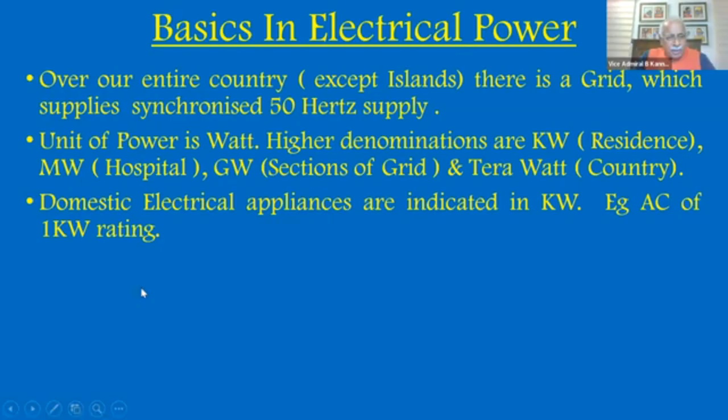Domestic electrical appliances which you buy, refrigerator, AC, are normally indicated in kilowatt - how much power they need. So let's say you have an AC of 1 kilowatt rating in your house, in one of your rooms. That AC wants 1 kilowatt of power. 1 kilowatt means 1000 watts of power it wants. If you run this AC for 1 hour...

...it consumes energy of 1 kilowatt hour, and that is your standard unit in the KSEB bill. When you see the KSEB bill, it will say so many units you consumed - actually, the unit is kilowatt hour. If you run your AC, which is 1 kilowatt rating, for 1 hour, then it will take 1 kilowatt hour of energy. So see the difference between power and energy: AC needs 1 kilowatt power, but when you run it for 1 hour, it is 1 kilowatt hour of energy.

So energy is power into time. Just remember this, because you will find some graphs being shown, which sometimes represent energy, and we'll talk about why we have different sources of energy, etc.

Now, the same thing, I said kilowatt hour. It can extend to gigawatt hour, it can go to terawatt hour. Whatever is the wattage multiplied by hour is energy. Just remember that. I finished with the basics of engineering. You have to just remember energy is power into time.

In your house, the meter is fitted. It's called the energy meter, because it measures how much energy you consume, and your bill will be prepared accordingly. For 1 kilowatt hour of consumption, so many rupees will be the charge. So energy is your consumption. Power is the rating of the appliance or of the building or of the institution, etc.

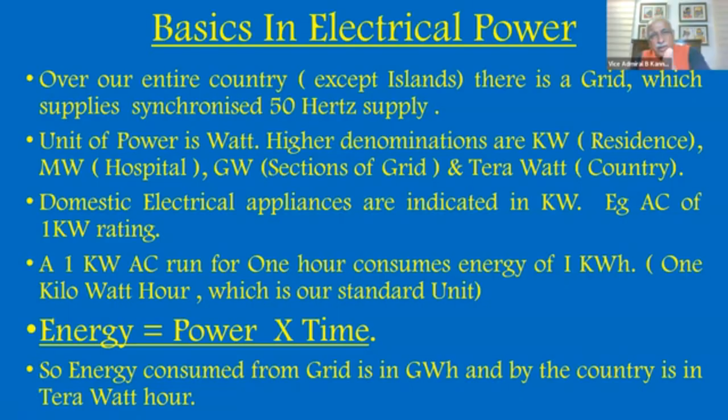Okay, so let us start our introduction to the topic.

India has got 16% of the world's population, and everyone, as per government, has got access to electric supply. As of now, every house in India has got supply by the grid, which is one common grid. But India consumes only 6% of world supply. That means our consumption of energy is very low. Population is 16%, consumption of power 6%.

We are very fortunate. We don't require so much cooling in summer. Summer is not very long. Then you have a good monsoon. Our cold places don't require so much heating up. So your consumption of power, of energy, is less.

The Ministry of Power in Delhi controls generation, transmission, distribution, etc. They give the guidelines. They make sure the contracts are in place, etc. And they also import and export power from other countries.

That's important information. We buy power from Bhutan, we buy power from Nepal, but we also give power to Nepal at some other point. So at the moment, it's only Bhutan and Nepal which is involved with our power. Bangladesh is not there, but we have some plans to give to Sri Lanka and in the Middle East also, though that has not yet started.

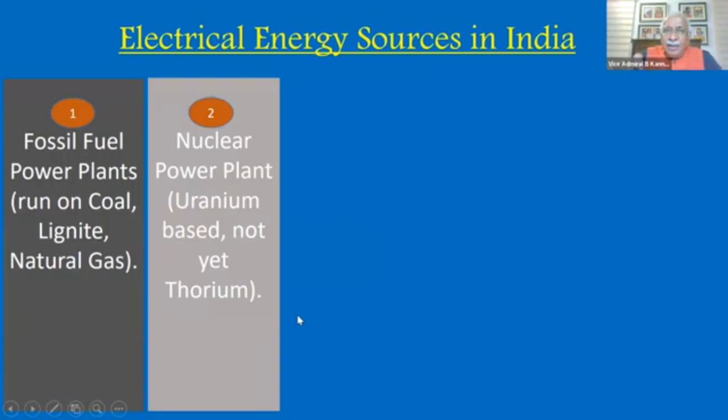So let us look at what are the sources in India. First is fossil fuel - coal, lignite, natural gas. That is one type of source of power. Second is nuclear, based only on uranium. We had hopes that our thorium plants will work, but it has not been proved so far for commercial application. So our nuclear power plants continue to work only on uranium, which we don't have enough of.

We'll come back to this point - just remember our nuclear power plants work only on uranium. Thorium is still an experiment which is going on. Then renewable: solar, wind, hydro is also renewable - when the rain comes, it renews the water, so it's called renewable - and biomass. All these are a form of renewable energy.

Hydroelectricity and biomass, etc., can give power for 24 hours. But solar and wind are normally around 12 hours in a day. So there is a little bit of variability in their availability.

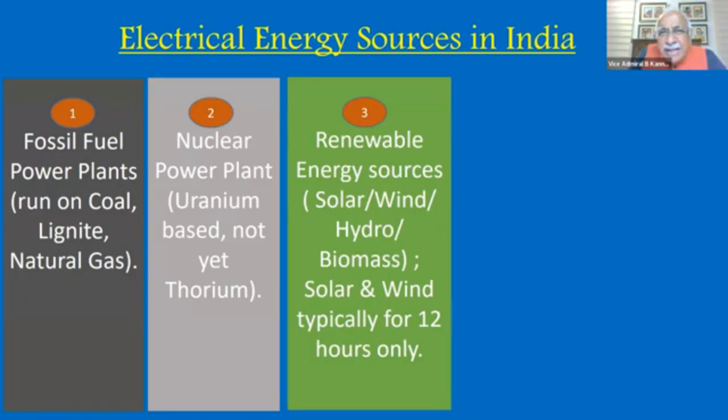They're not available for 24 hours, so this is something you have to factor in as we discuss. All these combinations of 1, 2, and 3 are called the energy mix. That's what the government works on, saying we will produce the necessary power for 2035 by working on a mix, and that is what is given in the plan.

As far as India is concerned, there are other types of energy which many countries in the world are generating, like geothermal, tidal, and wave. In India, these are not there - all are in research and development, and some have been attempted and failed. So as far as we are concerned, point number 5 is zero in India, and is not likely to come for the next 20 years. So we can forget about point number 5 - it is just 1, 2, and 3.

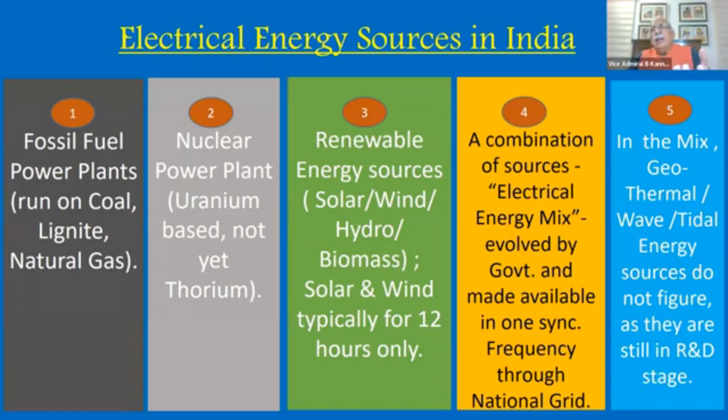Based on their capacity, we have to make a mix. So how do you make a mix? From the generation side, you should look at fuel - is it available? I told you uranium fuel is not available in plenty, so we have a limitation there.

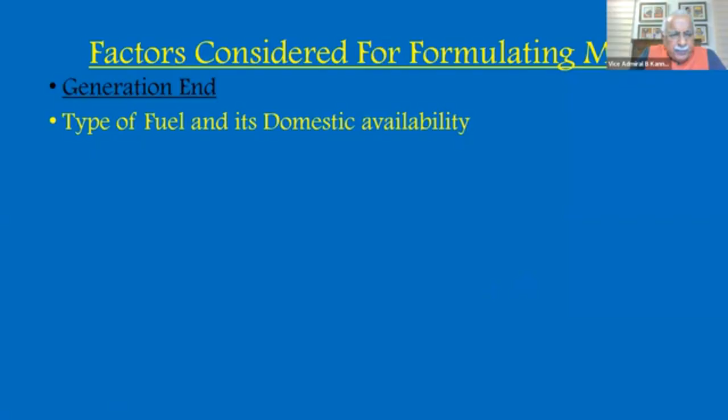Then how much does it cost to generate power? For information, solar is the lowest at 2.5 rupees per unit. Coal is 5, nuclear is 6.5, gas and pumped storage - I will come to this word pumped storage - at 9. So it's very expensive. You have solar as the cheapest and therefore very attractive, coal is around the midpoint, and nuclear is more than coal.

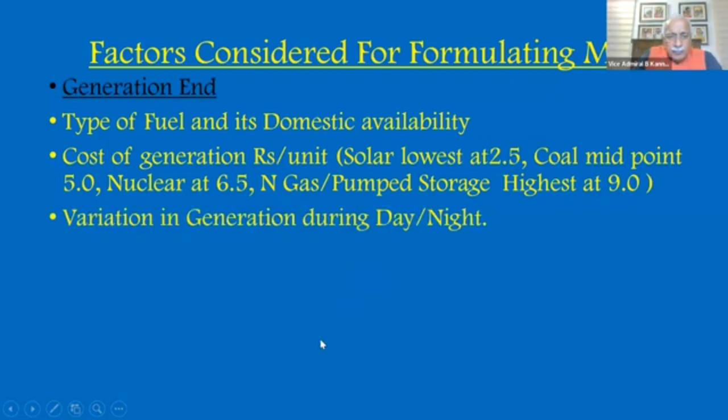And I told you there's variation in generation during day and night, especially for solar and wind also - sometimes wind is there, sometimes wind is not there. Another factor you have to consider is how much time it takes to start a plant.

A coal-powered plant takes 5-6 hours, nuclear takes about 3-4 hours, and gas-powered takes about 4 hours. Only after that can you get the energy you want - it takes time to start the plant, it's not that you press a button and straight away it starts. So this is an important factor to be considered. Even hydro takes about 3-4 hours because you have to release water, and before releasing it, you have to announce to people on either bank that water is going to be released, and only then does the power start. You may not shut it down quickly, but to start it takes about 3-4 hours.

Similarly, from the load side, what is the peak load which is coming? Normally in summer you find the peak load is during summer, but sometimes in some states you find peak load even in winter because of heating requirements in various houses, institutions, and hospitals. In winter the load is something else, in summer the load is something else - all this has to be considered. And during monsoon also there is a variation in load. So when you formulate the mix, you take into account all these aspects, how the mix has to be and how the grid is laid out, and then you work it out.

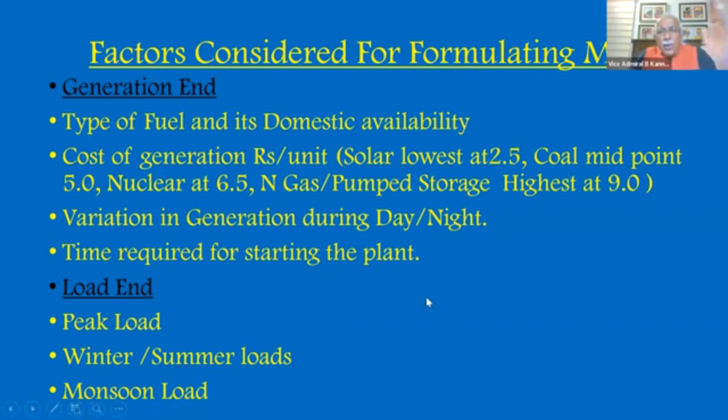So this is what the National Electricity Plan has given. I'm not going to go through this, but I'm going to give the final conclusion which the National Plan has given. But before that, how does the government go about these efforts?

Government goes about this on 3 aspects: minimize carbon emission, which I told you earlier; second, reduce imports - we don't want imports of coal, we don't want imports of gas. And for information, crude oil, which is used for petrol and diesel, is not used in power generation that much.

Unless it is in some house where you have a generator running on diesel, or in some hospital with generators running - those are small issues. So main power, petrol and diesel are not used. But diesel is used in Andaman Nicobar Island and in Lakshadweep - we're not talking about the islands. So coal and gas, we don't want to import.

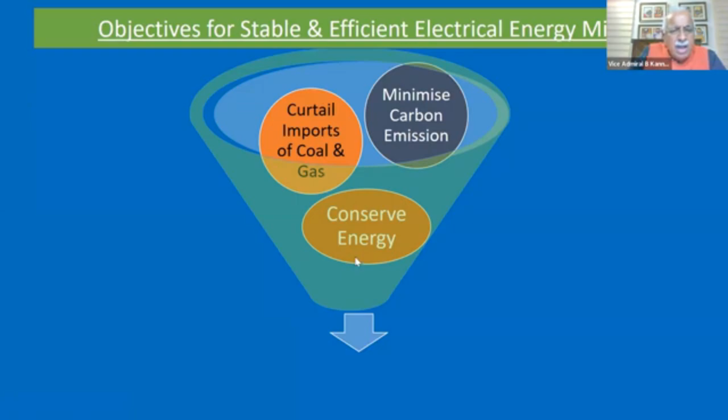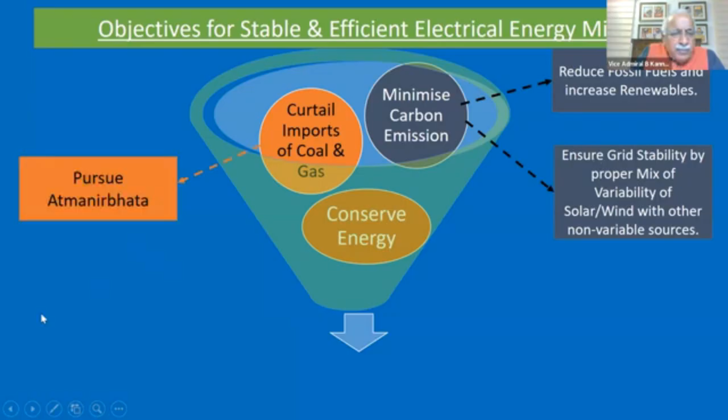You want to reduce the imports, you want to reduce the carbon emission, and you want to save on energy - don't have inefficient appliances with us. So minimize carbon means reduce fossil fuel and also increase grid stability. Don't use imported coal, use Indian coal only - though Indian coal is not all that clean, it's got a lot of ash content. But you want to pursue Atmanirbharta on that.

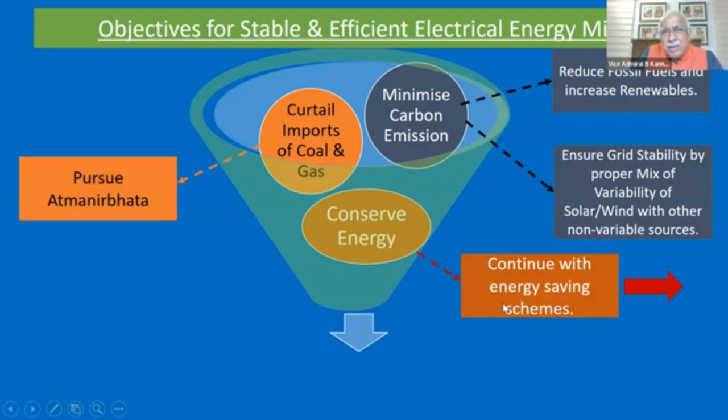And conserve energy by continuing with energy schemes. So I will show you what has been done in the last 15-20 years on this front. When you want to save energy, use LEDs - LEDs were not there before 2015 in a very popular manner. So far, the government has distributed 36 crore bulbs.

Bureau of Energy Efficiency started certifying appliances so that it will tell you a 5-star, 4-star, or 3-star rating for ACs, refrigerators, depending upon how much power they consume. Solar-powered emergency lights have started from 2010. Then there's the Surya Ghar scheme - I'm sure some of you may have it - by which the government subsidizes your solar plant to be kept on your roof so you can take power from the sun directly. For agriculture, solar-powered pumps have been started from 2019 as part of a subsidy for farmers.

Industry 4.0 applications have come up which use power content. Solar farms have come in a big way, but solar farms have got a problem called duck curve. I'll come to this in a subsequent slide and tell you a little more about it, which is very critical for stability.

And government has started running green grids. That means all the green energy coming from solar, wind, etc., goes through a separate overhead transmission line. This has run almost 10,000 kilometers now since 2021. On that line, power will be available only when solar is available, so it will be, let's say, 6 to 6 availability as it stands now. The government is also trying to reduce our transmission and distribution loss.

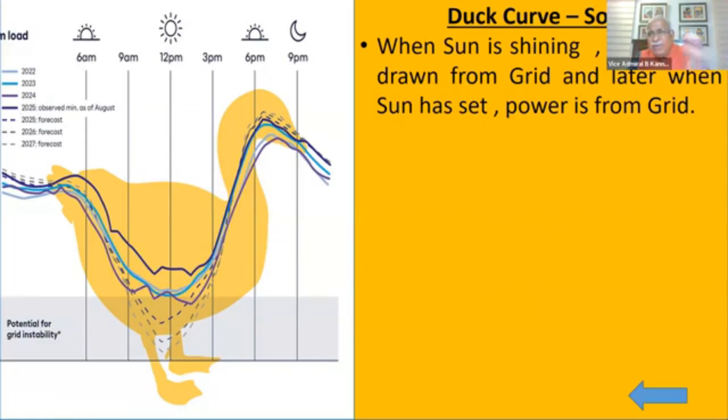So duck curve is the phenomenon of solar power. Wind is also similar, but wind doesn't follow exactly the solar curve, slightly different. But basically, the effect is that solar and wind have got variability. It varies during the day, and that affects the demand on other sources. When the sun has set, you find the equations are changing in the mix. This is something to be understood.

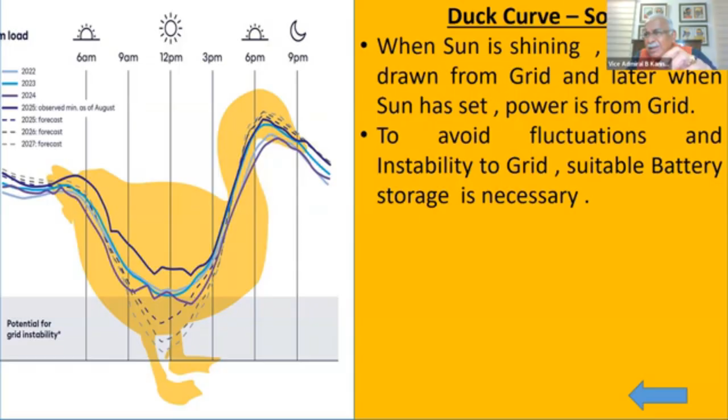It depends on where the grid is supplying, what loads are coming, what maximum demand is coming, etc. All these are given in the plan, but this has been considered an important issue, and we will talk about this consequence only in subsequent slides.

So I've told about Surya Ghar, and when you use a Surya Ghar solar panel of small capacity, I think it's only 3 kilowatt or something, the panel uses a lead acid battery, which is normally used in trucks, motorbikes, cars, etc. But when you want big solar arrays like in Nedumbassery, then you go for lithium-based batteries, which have huge capacity. Of course, lithium-based batteries are not easily available in India; they're just about starting production now. So you find there is a problem with battery availability if you're talking of big power.

So leave out that issue. Duck curve brings some problems to the grid. Just remember that. Your house may not be causing that problem to that much, but if all the houses do the same thing, then there could be a problem to the grid. Okay.

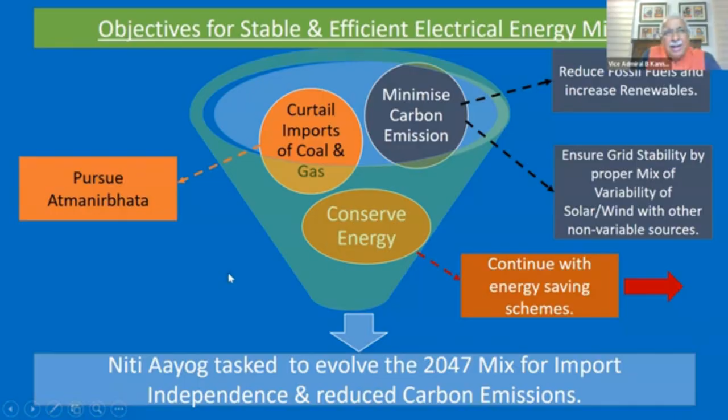So what happened? The government said, let us tell somebody to study this in more detail. So they tasked Niti Aayog to tell us what should be the power mix in 2035 and 2047. Where will the power come from for the whole country? Study it and give us a report. So Niti Aayog was tasked this in 2023, and they have submitted the report. I'll borrow some inputs from that report.

At this point in 2025-26, coal is giving 72% of energy as of now, and renewable energy is only 28%. When I say renewable energy, I'm including solar, wind, hydro, and also nuclear. All this put together is only 28%. Coal is giving 72%. But if you compare their capacity, it is almost half-half.

So the government says we have set up 50% capacity in renewable. But it is only capacity, it cannot deliver because of various issues. So coming back to this: 50% capacity coal, 50% capacity renewable, but power given or energy given is 72% from coal and 28% from renewable. So there is this imbalance which is already there as of today.

And how to correct it is the issue, because you cannot go on like this, or you will be burning coal till we find another substitute. What is the substitute the government is thinking of? Government has got some plan to substitute and reduce coal, because carbon emission is dependent on how much coal you burn. So we look at how we go around that.

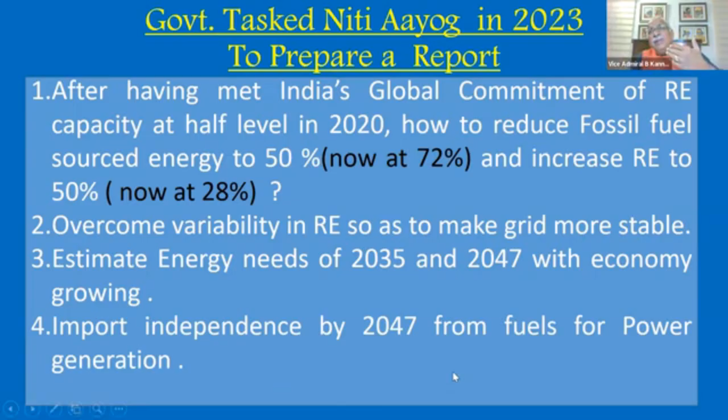As I told you, variability is an important issue regarding stability. So Niti Aayog has found out for 2035 and 2047 how it will grow, how much power is required, how much energy is required. It's all based on some estimates. So how did Niti Aayog do this estimation?

Let's take 2025. What is the present situation? Our capacity is 505, out of which coal is 249, almost half. The rest is everything else - there is solar, hydro, wind, nuclear, and a little bit of bio. So you find it's 50-50 almost.

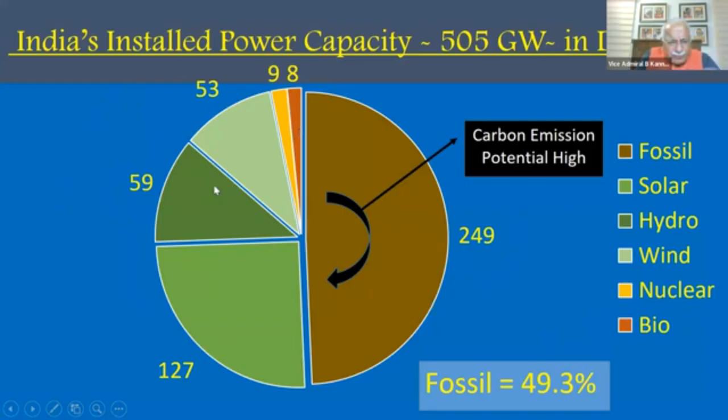But when it comes to consumption, 72% is from coal, as I told you. Even though capacity is only 50%, they give 72%. And therefore carbon emission is depending on that 72%, while 28% renewable is supporting a little bit of reduction in carbon. So you find we need to increase this green color and reduce this brown color, and thereby achieve lower carbon emission.

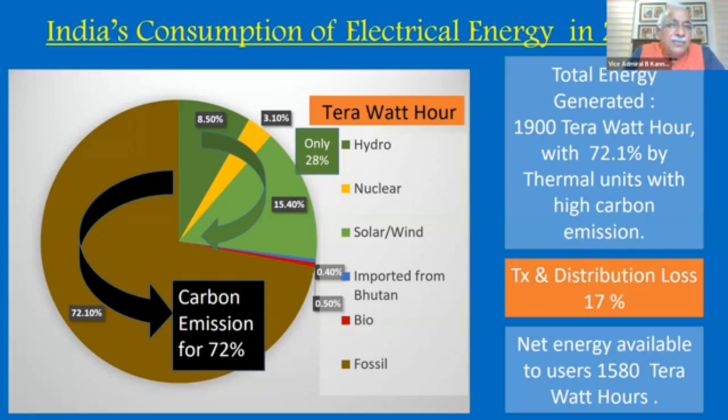There are some details, but there's only one thing I want to flag. I was surprised when I studied this - our transmission and distribution loss today is 17%. That means if Kudankulam nuclear power plant gives 1 gigawatt or 1000 megawatts, by the time the power is received somewhere else and started being consumed, 17% is lost in transmission and distribution. It's a huge issue - we're losing so much energy in transmission and distribution.

We should find technological solutions required for this. Some are being suggested in the report, but I think this is an issue which is not going to reduce considerably, though there could be some reduction. I'll touch upon this as we go along.

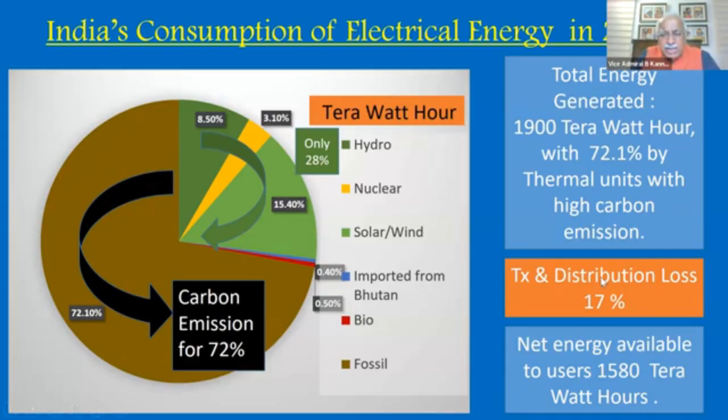So let us look at what have been the three sources of electrical energy in 2025. First is coal - I told you emission is high. It can be reduced if your nuclear, hydro and biomass can expand, because they have got no variability - they are available round the clock. But this black cloud of carbon emission will always be there for coal.

Then there is another type called nuclear, hydro, and bio - no carbon emission.

Reliable, no variability - it doesn't vary during the day. It's very important. If you can bring this yellow color up, then brown can go down, because it has got all the good properties of fossil fuel. On top of it, it doesn't have emission.

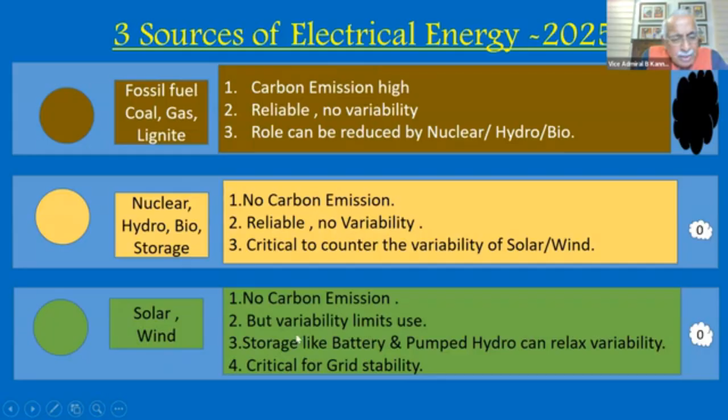The last one is solar and wind. No carbon emission, but variability is limiting the utilization. So you require storage, which is either by battery or pumped hydro. I will talk about pumped hydro. This is very, very critical for grid stability, because it being available only for 12 hours a day maximum.

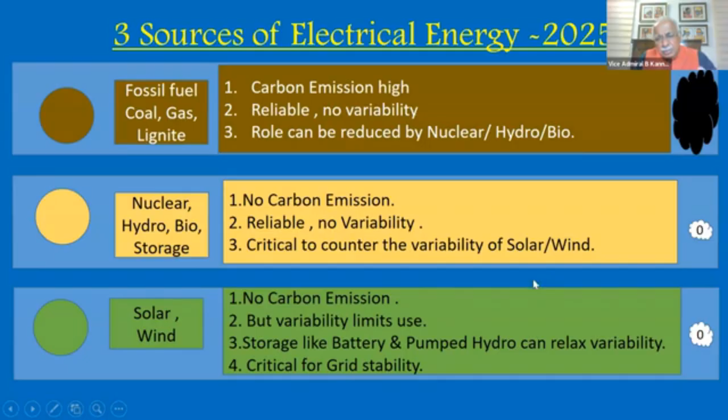The report says in the years to come, there are three sectors which are going to consume huge amount of energy: electric vehicles, data centers, and railways. This triple combination is going to really demand a lot of energy.

If you look at what is happening in our budget, presented 2 days back, data centers have been given a big push. EVs are already under big push to reduce pollution of diesel and petrol. And railways also starting hydrogen train - I think in another 2-3 months, the first train will run on hydrogen. And therefore they're also consuming a lot of power. So these three will consume a lot of power in the years ahead.

And that has been factored in by Niti Aayog in their report. So let us look at what will be the scenario in 2047. Niti Aayog says: I have calculated how much energy is consumed by industries and transports and commercial building, residential building, telecommunication, cooking fuel - various sectors, how much they are doing in 2022. Then I've estimated they'll grow like this, and from the growth I will say in 2047 I require so much of energy.

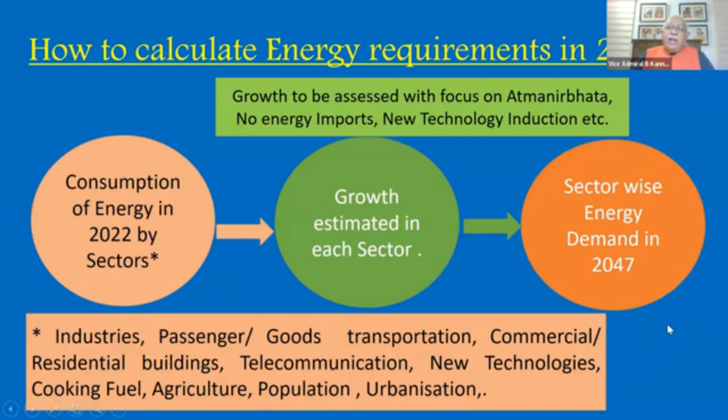How it will happen, what all the correction mechanisms are required - now you remember the mix. The mix, renewables plus nuclear plus hydro should give 85%, and coal will give only 15%. That is what Niti Aayog has worked out. How it will happen, we'll discuss. Or will it happen at all?

So India's power capacity is 505, as I told you earlier. We generated a lot of energy, meeting our requirement. 17% was lost. In 2047, this is the 85% green and 15% this. From this, you require a huge expansion for renewable, for nuclear, for hydro. All this needs to be expanded. And a lot of storage mechanism had to be built so that the disadvantages of solar and wind are reduced, and that can form the 85%. This is what Niti Aayog is saying.

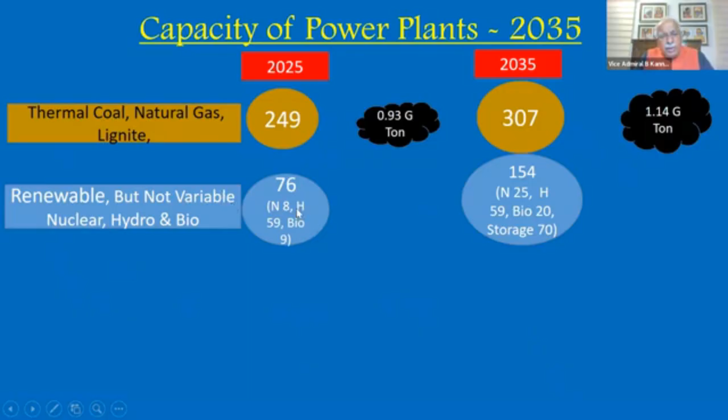Renewable is also going up - renewable but not variable: nuclear, hydro, etc. will also grow from 76 to 154. They're going in the correct direction. Green also going in the correct direction. Total, what was 505, will become 1,000 something - we'll double our capacity. But emission is not reducing enough. And I'll tell you why: this 154, which has come from nuclear, from bio and storage, is not big enough to reduce coal.

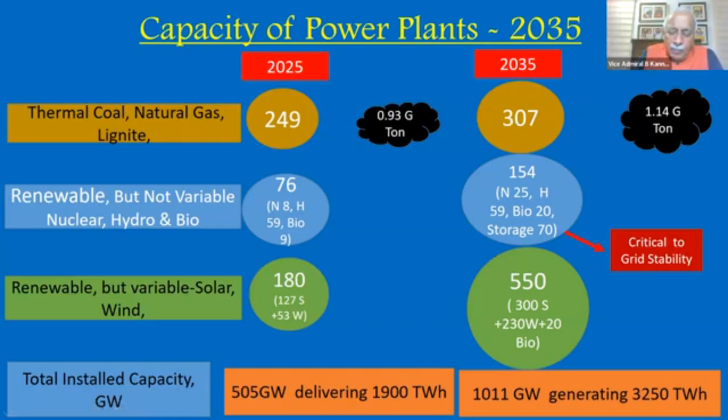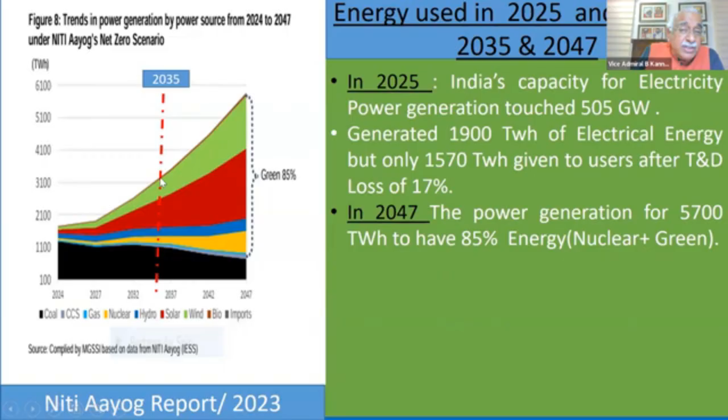2035, we want more power. If I go back, you see this graph - I require this much of power. Today I am here, I require this much more power. Who will give that power? Who will give that energy? Whatever hydro, nuclear, etc. are doing, that is not good enough. It has to be only coal. And till 2035, coal will continue to drive the power generation, and therefore energy will be consumed from coal.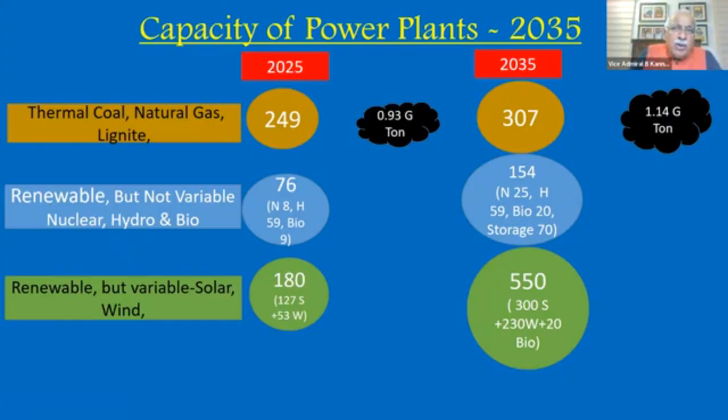More carbon emission. Okay, now the report also says India will require 1 terawatt power by 2035. I told you sometime back, it is 1,000 gigawatts - 1,000 gigawatts is 1 terawatt. So this capacity should be there.

So they broke down - I'm talking about the National Electricity Plan. Whatever I told you, the previous graph - 307 coal, something else. And nuclear is still very low in this report. Why? Today, nuclear power in India is producing only 8 gigawatts.

Today, total capacity is 505. Nuclear is only 8. Suppose nuclear power plants are coming in 2-3 places. If they all get completed by 2035, then nuclear will be 25 gigawatts out of a total of 1,000 in 2035. So our nuclear power plants are not growing.

Adequately to relieve the coal, because you require some source of power which has got no variability. And the no variability can come only from nuclear, hydro, or storage. So this is an issue. And one of the important points is that we should have more nuclear.

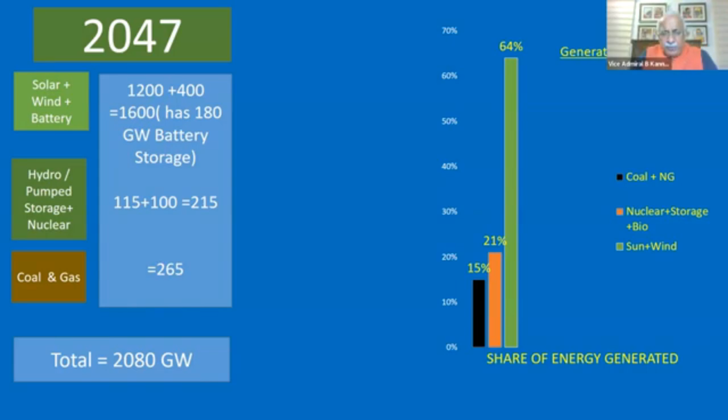So I will talk more about storage. So we will reduce the whole discussion to how can nuclear and storage build up and reduce coal to reduce carbon emission. So our whole thing has come down to this one particular sentence: how to build up nuclear, how to build up storage. So this is the most crucial for our reduced carbon emission and increased stability.

Okay, so I'm going to talk to you about what is pumped hydro storage. Very interesting concept. There's a reservoir here, let's take it as Idukki. So Idukki releases water. When it releases water, the generators there produce electricity, and you get power and you can draw energy from it. The water goes down and finally it'll go to some river and go to sea.

What pumped storage is, it takes water from here and pumps it back to Idukki. This water which has already been used for generation of electricity in the turbine is flowing down. From there, you draw water and pump it back to Idiki. This pump will work on electricity. For that, you use solar. So during daytime, when solar is available, you pump water from the channel and take it back to Idiki.

I'm giving Idukki as an example. It can be any hydro energy plant, and pump it back. And then you will continue to get electricity by releasing the water. Again, you pump it back. And these can happen simultaneously. When you're releasing water, water can be pumped on top. So scientists have estimated that the efficiency is around 70%, because you're getting free electricity from sun to pump the water up. And you will release the water and generate new electricity. So this is called pumped hydropower storage.

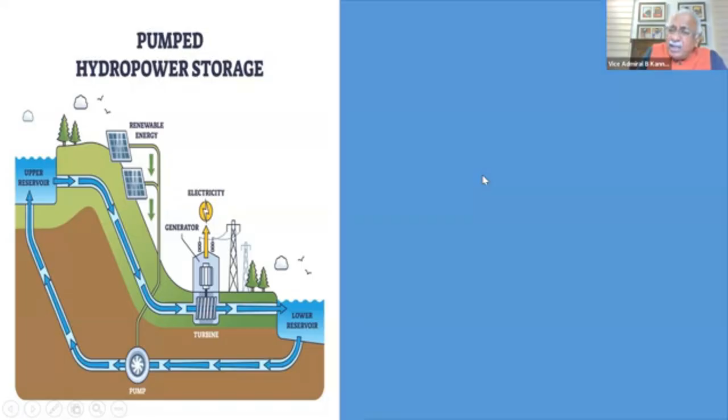China is doing this in a very big manner to overcome the problems of storage. They are able to store electricity, like they are able to convert hydro plants to run for longer days and months by just pumping water back to the reservoir. It's as good as rain falling in the reservoir through this pipeline. So this has been done in India. I think 2-3 places they have tried it out. It's working satisfactorily. Government is hoping that they'll be able to do this in a big manner in India, and thereby storage by pumped hydropower can be used.

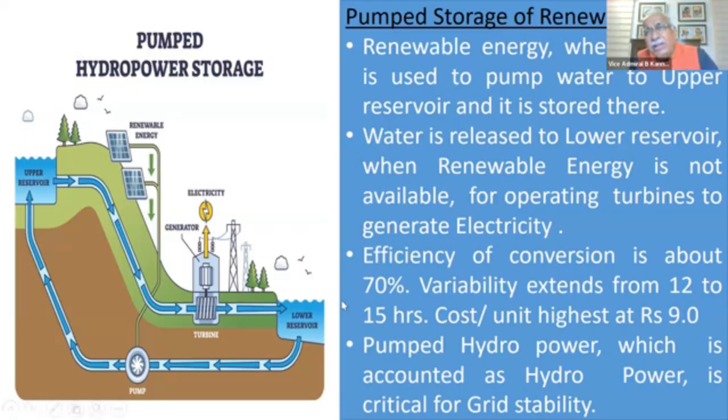Renewable energy, which is coming from the sun, drives this pump. Water goes up, water is released, and becomes electrical energy from the hydro plant, hydroelectric plant. It is not from solar. Solar is used only to run the pump, but finally it is by hydroelectricity which you get. They say the efficiency is around 70%, and by doing this, we'll be able to reduce the impact of variability of solar significantly. So pumped hydro is one solution which we have to do in a very big manner. For every dam, everywhere there is a hydroelectricity plant, we have to look at this, whether we can do it, and that pump can be run with solar power.

Next, our target is 100 gigawatts from nuclear by 2047. It's been announced in the parliament last year. We will do it, or we'll work towards it. And I have got some submissions to make on that.

100 gigawatts from nuclear power. Today it is at 8. We have to go from 8 to 100 in the next 22 years.

Government says some plants are being built now, and they will all get completed by 2035. So by 2035, we'll have 25 gigawatts. We are today at 8, will become 25 in another 7-8 years. But we have to reach 100 by 2047. So how do we do it?

All our plants are running on uranium at this point of time, and we don't have enough uranium to feed all the plants. We have to import, and you can import uranium only if it's given by the Nuclear Suppliers Group. And the Nuclear Suppliers Group will give you uranium only if that plant is subjected to inspection by them.

There are some plants in India which are not under inspection by the nuclear supply group. But I'm sorry, inspection is by the International Atomic Energy Agency. So that agency inspects your plant, whether you're using it for nuclear weapons or not, whether you're accounting for all the fuel, etc. Then only will you get your fuel exports or imports cleared.

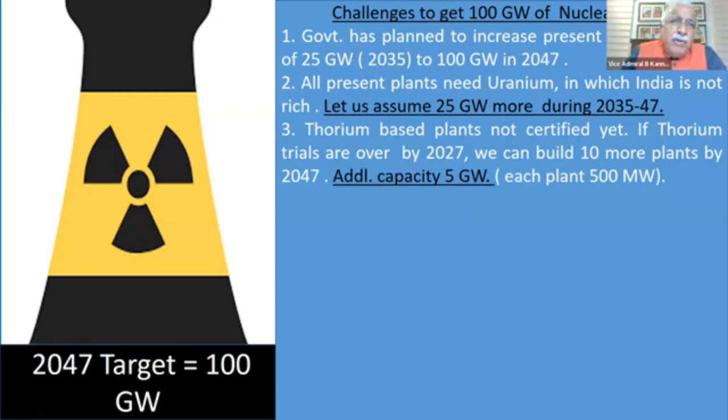Now, thorium. We have been struggling to make thorium run nuclear power plants for the last 10-12 years. It has not succeeded, results are not good, we haven't cleared it for operation so far. But I'm assuming it will get cleared in 2027. Let's make that assumption - in 2027 the thorium project will become successful. And then we have time to build some thorium plants.

Thorium is available in plenty in the beach sands of the East Coast, West Coast, and most importantly West Kerala. So let's assume 10 plants will be made of thorium. Each plant is around 500 megawatts, that is 0.5, so another 5 gigawatts will come. So 50 has become 55.

Now a new concept has come - you will make small modular nuclear reactors, called SMR. Their design is going on in India. Let's assume the design will be complete in another 3-4 years' time. The interesting point is this nuclear reactor will be fitted in the industry.

Let's say there's a refinery which draws power from the grid. Tell them, don't draw power from the grid now - install this small modular reactor inside your factory, and that will give you all your power. You will have a small nuclear reactor inside your factory premises, maybe safeguarded well, secure place, all the safeties considered, but that will give you the power. And that is captive to you - like you have a captive generator, you'll have a captive nuclear plant.

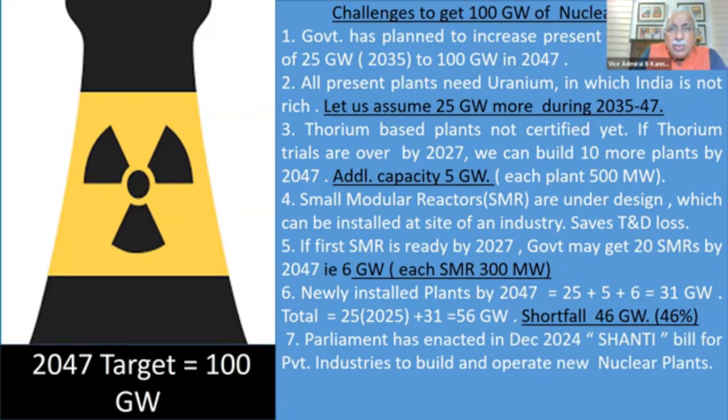But on the ground, there are some technical issues which may let us down on the power generation side. So can private industry do it? Doubtful. But assuming it will happen...

Now I come to my conclusions. India's transition may have achieved 50% capacity, but the intensity of carbon emission reduction has not still been realized—that study is still going on, and it is expected to happen, but that's not much of a success yet.

Fossil fuel is today 72%, and solar and other renewables are only 15% due to variability. It's a reality. The variability can only be countered by battery and pump storage. Battery means you have to make a lot of lithium batteries, huge batteries as big as this building. You need battery complexes in various places to store electrical energy, and the next day you release it while it is charged by solar panels, and pump the water—which I already discussed.

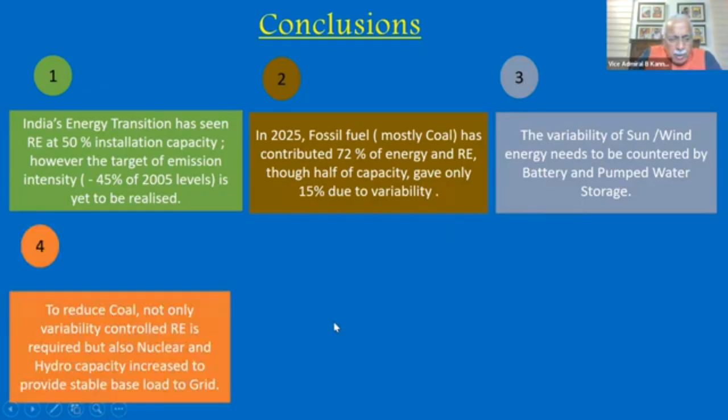So reducing coal can only happen through storage and nuclear. Government's 2047 target seems very ambitious for nuclear. For pump storage, I'm not very sure how many presently working hydroelectricity plants can be converted. It should be possible since the modification isn't that difficult, but there's no clarity yet on how many plants will be converted to pump storage. But if we assume it happens, then only half the solution has come.

Nuclear is definitely not going to reach 50%, as per me, and that is something we'll have to face. We have to substitute that part of nuclear with coal, as per me.

So what will happen? Coal imports will reduce because we have contained pump storage to substitute coal. We'll use Indian coal, which unfortunately emits more carbon. Can't help it—if we don't want to import coal, we have to use Indian coal, which is available in plenty, but with more carbon emission.

And natural gas is very expensive, and we can't afford it. Whatever natural gas we produce in India is enough for meeting other industrial requirements, for running auto rickshaws as CNG, compressed natural gas, or some small power plants. But major power plants set up on gas, we cannot run because we don't have enough gas. If you buy gas from abroad, it's very, very expensive—you've seen it's almost 9 rupees a unit for power from a gas-based plant.

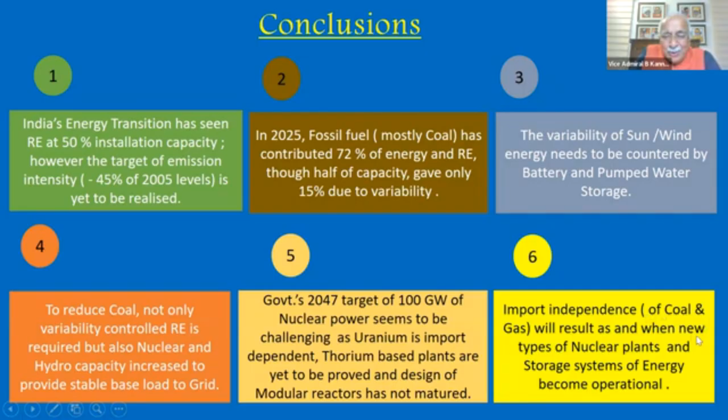So we have a situation where coal may have to continue as king even in 2047. So till nuclear and storage targets are met, king coal will continue and carbon emission may not get checked.

If you watched the budget day yesterday, there was a statement by the finance minister saying we are allocating a large amount of funds for carbon capture, utilisation and storage systems. What is this? This means in the exhaust coming out of coal power plants, we will have technology to remove the carbon.

Carbon capture world over has not been very successful till now. They're looking at various technologies for how to chemically absorb this carbon. But India is hoping they will be able to get a technology, either imported or developed in India, and carbon capture will reduce carbon emission.

I thought it is a backup plan—that if nuclear doesn't succeed, pump storage doesn't succeed, and coal comes back to the lead role, you will have carbon capture coming into the factory power plants to capture the carbon so that it is not released in an uncontrolled manner to the atmosphere. I think only in another 4 or 5 years will the picture become clear.